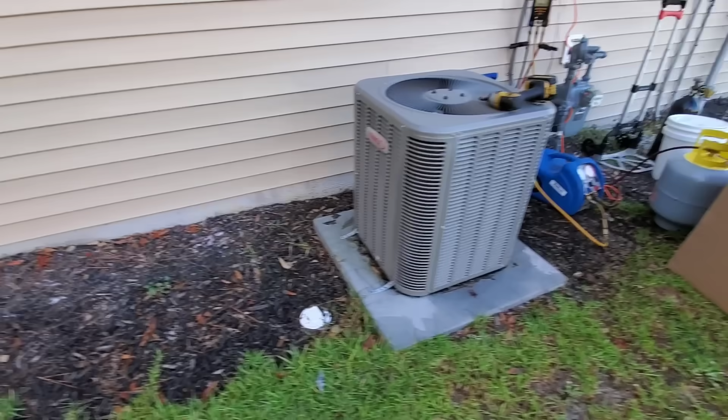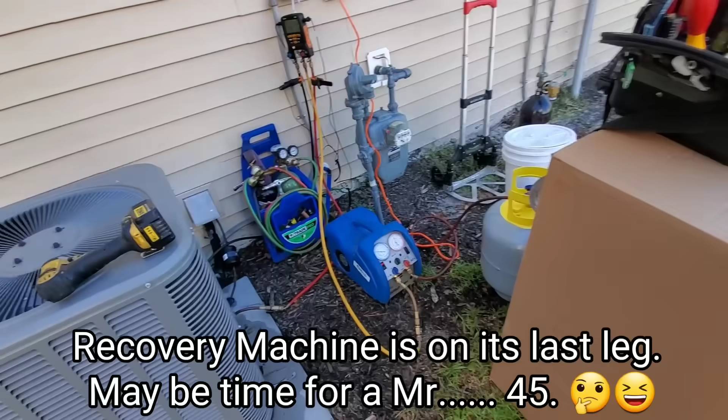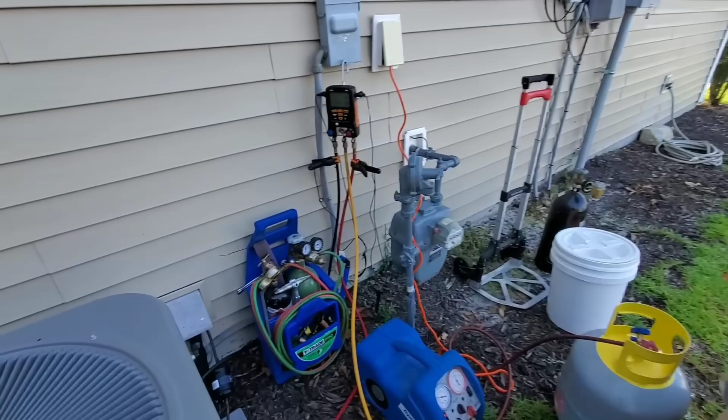This morning's job is to replace a condenser coil in this straight AC Lennox unit. It's under warranty. I think it's a 2016. 2014. But we're in the process of recovering. Down there, we've got a little ways to go, so it's just getting all my stuff out here.

Obviously we got our condenser coil right here. Should be pretty simple. I'm going to go ahead and start breaking down this unit, getting all the panels off, getting these little makeshift hurricane straps and things off, and yeah, get it ready to unsweat once we get it recovered. Well, she broke apart pretty easy. Like I said, it's a straight AC also, so there's not a whole lot of components or anything inside.

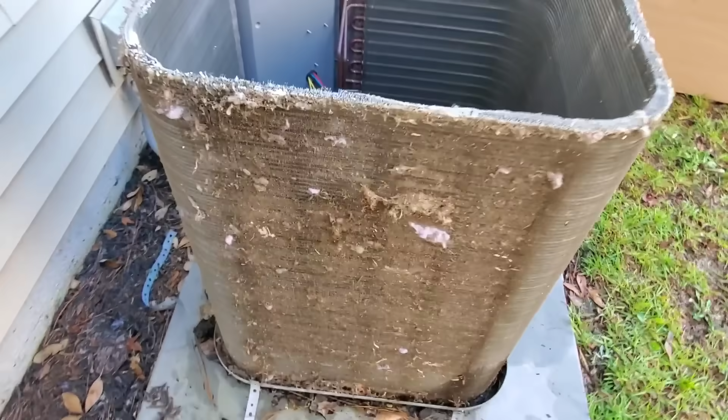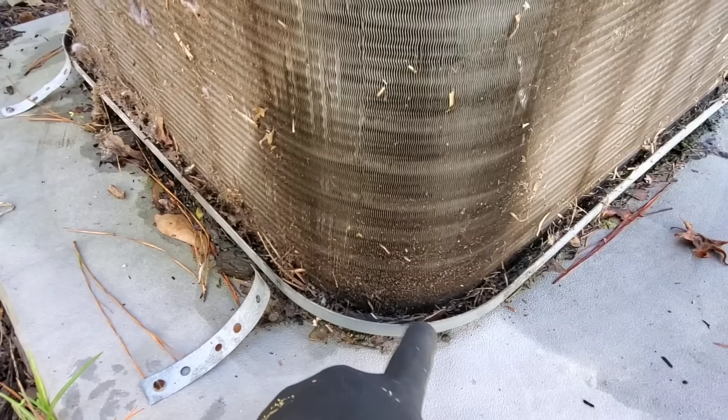You can see this coil's been pretty neglected. And if anybody was wondering, that's where our refrigerant leak is. It's actually on this bottom tube. Looks like it's rubbed against the base pan. So if it wasn't under warranty, it'd be pretty simple to fix. Unsweat it, flip it over, fix it, and reinstall.

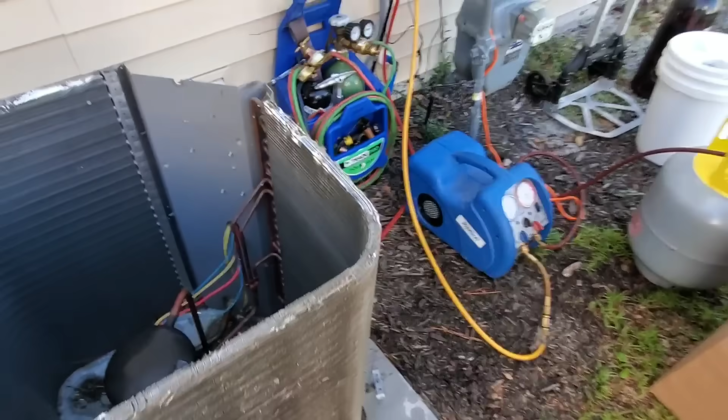But since it's under a parts warranty, there's no real reason in doing that. When you're taking it out to fix it, you might as well just put a new one in. So that's what we're going to do today. She's almost recovered. Getting close.

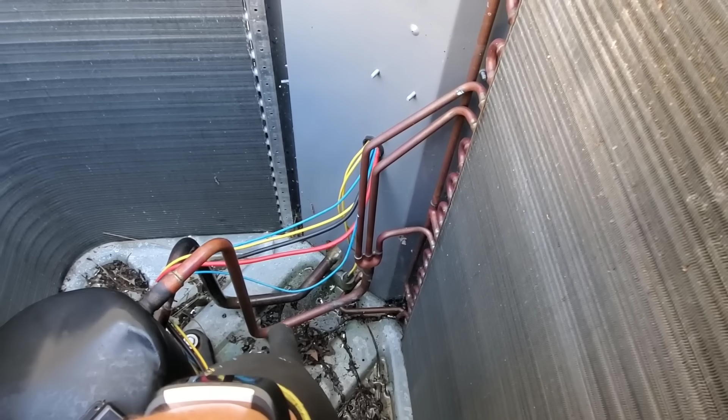And the new coil, we're going to unsweat this discharge right at the bottom of that header right there. And it's going to be kind of hard to see, but there's a pressure switch down there, and there is a solder joint right in front of it. That's what we're going to unsweat and pull that out, disconnect that pressure switch, and that pressure switch is going to go on the new coil.

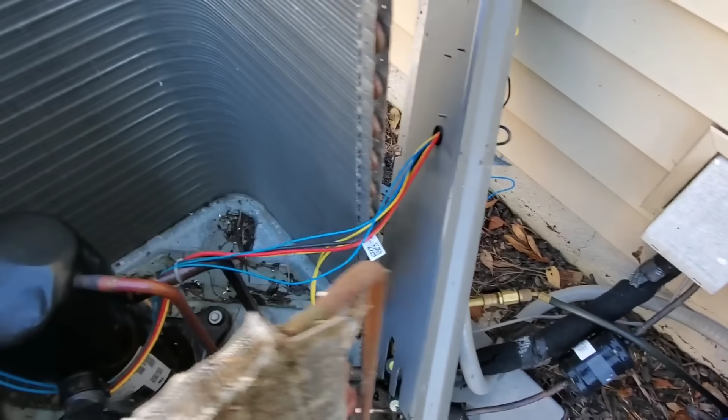We got her all recovered, guys. So now it's just a matter of hooking up some nitrogen and unsweating this coil. Like I was trying to show you before, I'm going to unsweat right here, because from here back, including that fitting for this pressure switch, is included on the new condenser coil. And then we're going to be unsweating that fitting right there. So pretty simple.

Like I said, we're going to be reusing that pressure switch. You can see it can unscrew off of that port. So I'm going to go ahead and unscrew that. I'm going to put a refrigerant cap, wherever I put them. I'm going to put one of these on top of it in its place. And then we're going to hook up the nitrogen, so I can just flow nitrogen and make sure it doesn't just escape here. Make sure it goes all through my condenser coil, so we can displace that oxygen so we don't have any carbon buildup in there.

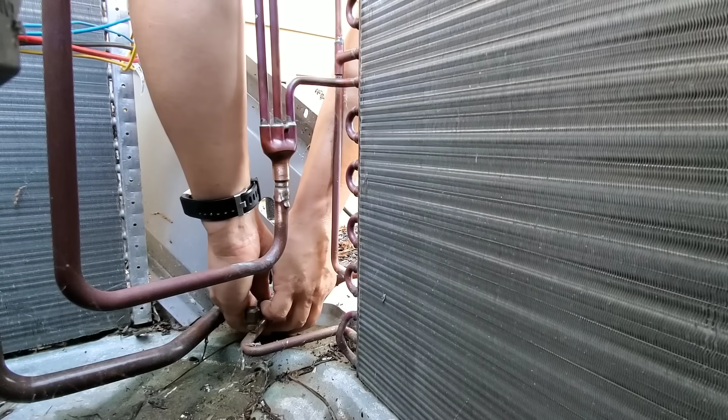And now it's just down on the breeze setting, so it's only between 1 and 3 psi, just a little bit, which is all you need. Let's go ahead and toss some of this. This is Hot Block by Solder Weld. Just gonna toss some of that on there to keep that service valve nice and cool.

See if we'll get this discharge line disconnected first. I think there's 2 fittings right there. It's kind of hard to see.

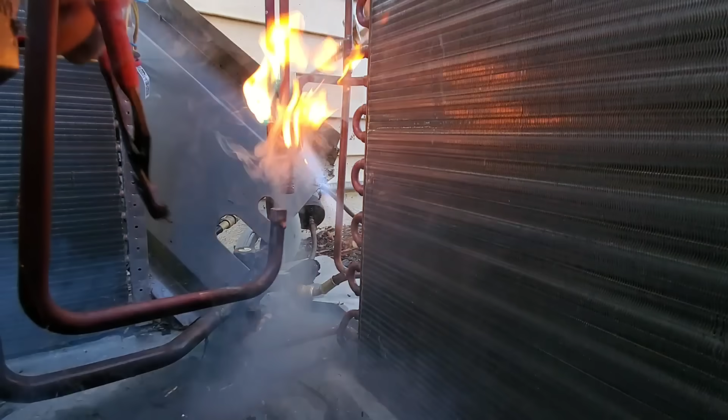Fire! Alright. Go ahead and sweat this liquid line down here.

Up the nitro just a hair, help cool that liquid line valve down. And it's as simple as that, guys.

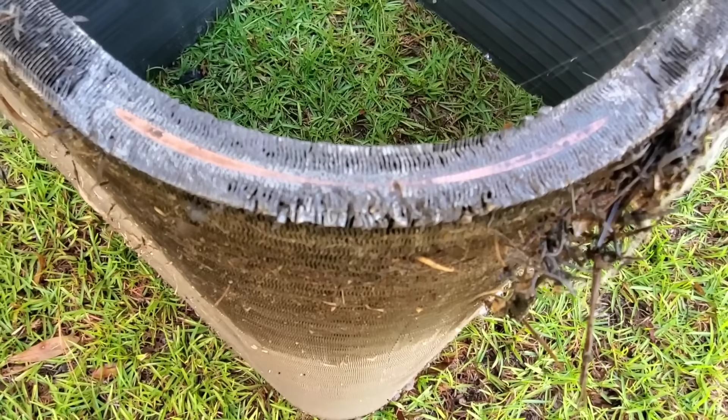Alright guys, we got our coil out of there. You can see here, got the coil flipped over. You can just see she's been rubbing. I don't see an actual hole. It looks like right there might be the culprit, but it's hard to say.

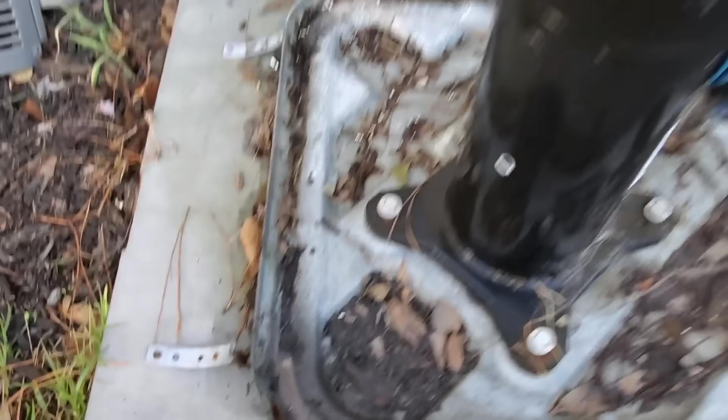So likely what I'm gonna do is put maybe a piece of Armaflex or something down here, or some cork tape, just to try and protect that coil so it doesn't happen again.

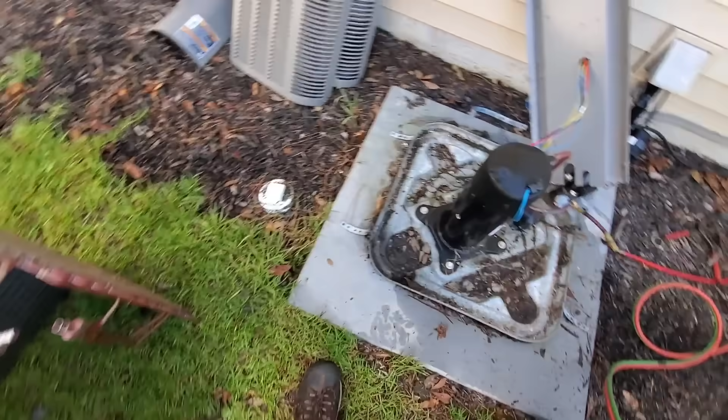Also, what I wanted to try and show, there, see how clean that is inside of there? That's from purging nitrogen. Without purging nitrogen, that would be covered in carbon buildup. So, super important to make sure you're purging with nitrogen, just so you can keep these units clean without contaminating them.

And we got this cleaned up pretty good. Not perfect by any stretch, but cleaned up. So put a couple pieces of cork tape, as you can see, down in these corners, just to give it something between those two metal surfaces so it doesn't rub or corrode as quickly. And yeah, we're gonna go ahead and pop that coil on and get this bad boy brazed up.

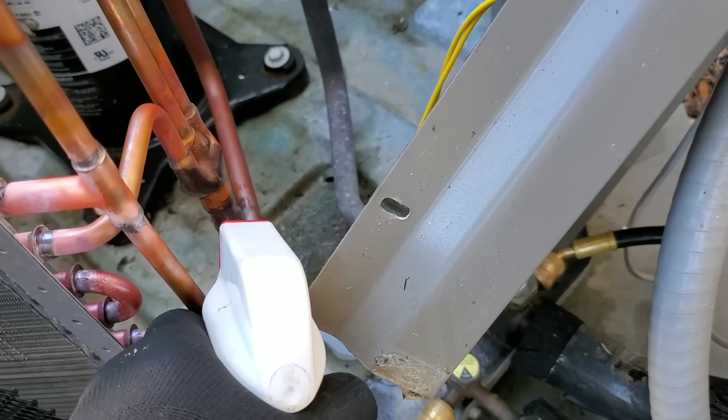Just got it on a super preliminary, easy for me to say, pressure test, just about 160 psi. Just going through everything with the Big Blue, just to make sure all my fittings and everything, that pressure switch down there, everything is nice and sealed.

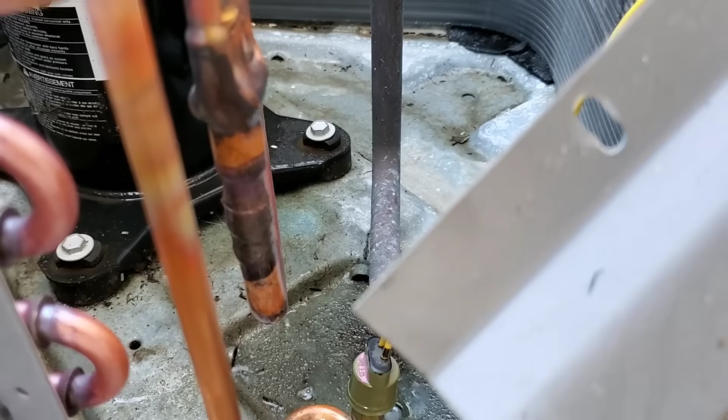And also on that pressure switch, I did throw some Nylog on there just to make sure we get a nice seal, and threw a backup wrench on there just to snug her down. But yeah, we'll give it a few minutes, make sure we don't see any bubbles, and then I'll be replacing that filter dryer, putting it on an actual pressure test, and getting her vacuumed down.

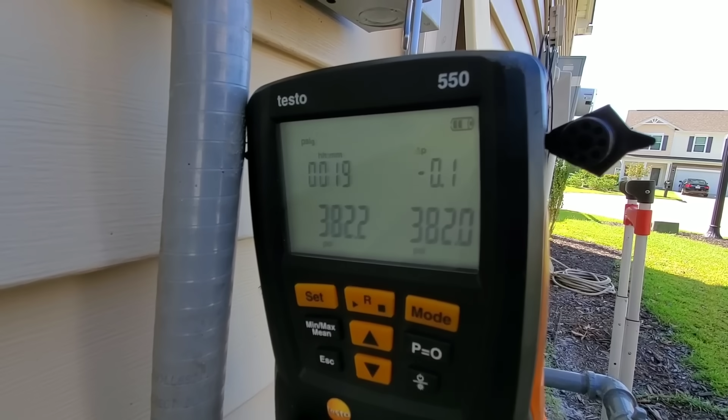Alright, she's all back together. I'm starting to pack up my mess now. Still got a bunch of stuff out here, but have it on my final pressure test now. Like I said, new filter dryer's in. Got my evacuation kit ready. Just on my final nitrogen test. 19 minutes and basically no drop. 1/10 of a psi. Holding at 382 psi, so we're pretty good there.

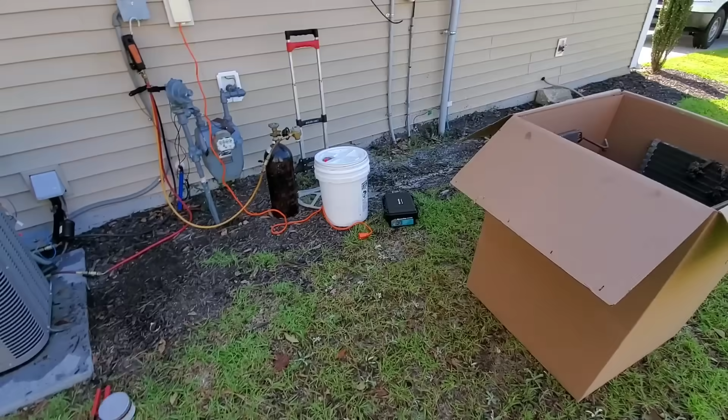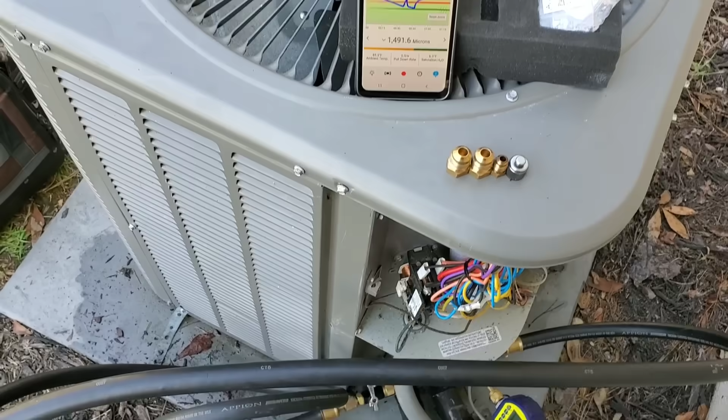But yeah, I'm gonna go ahead and finish packing up the rest of my mess, throwing this coil in the truck, and we'll get the VP85 out and we'll start this evacuation process. Just wanted to make this little update. I'm still pulling a vacuum on this unit. I'm assuming that the vacuum was never pulled properly, because we got down to 2,000, 1,800 really quickly, and then we pretty much stalled out.

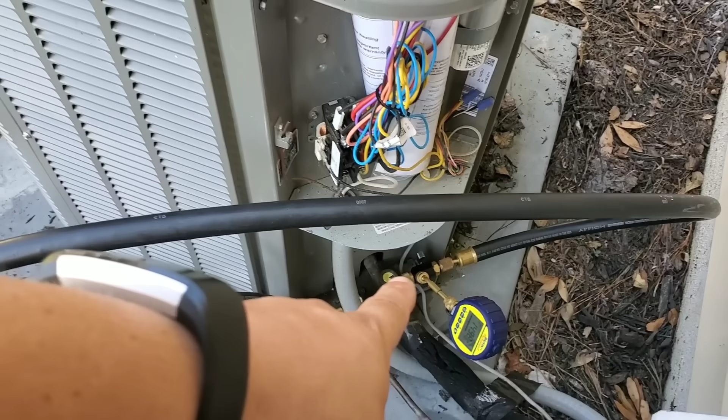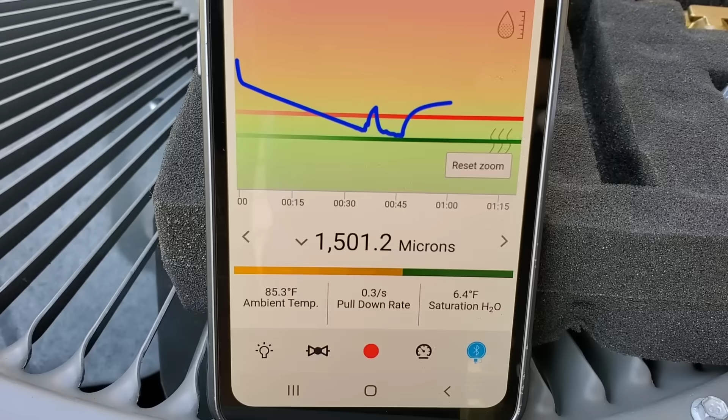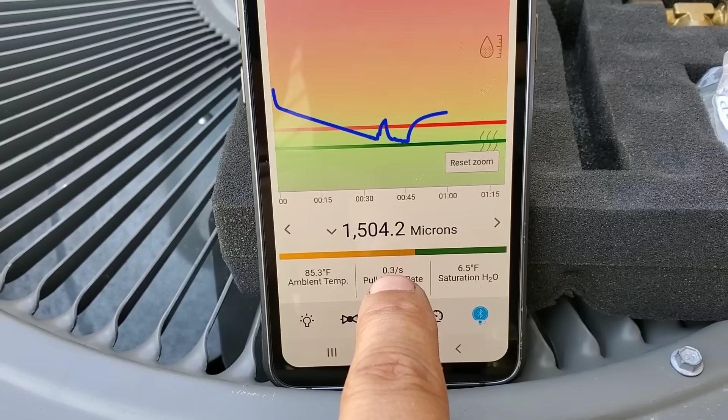So what I currently have is I have the system isolated. I have the Appion core removers closed. Not sure if you can see that. That one's closed, that one's closed. And I've just been letting everything naturally rise. And we started to slow down to almost stop, but this gives you a good idea. You can see this long broad arc right here where it rose and then it started to turn and level off. You can see right here we're still rising at 0.3 microns per second.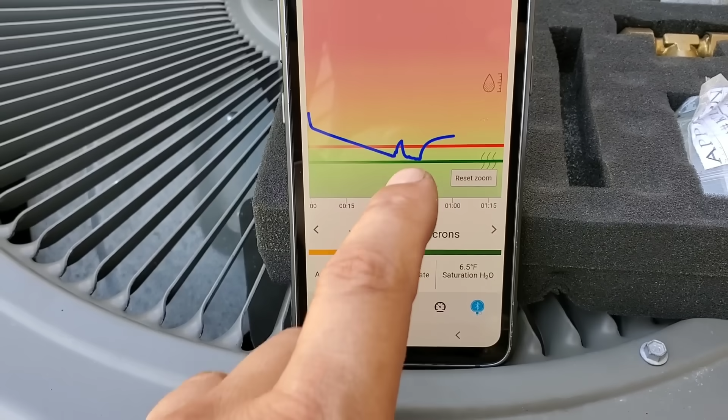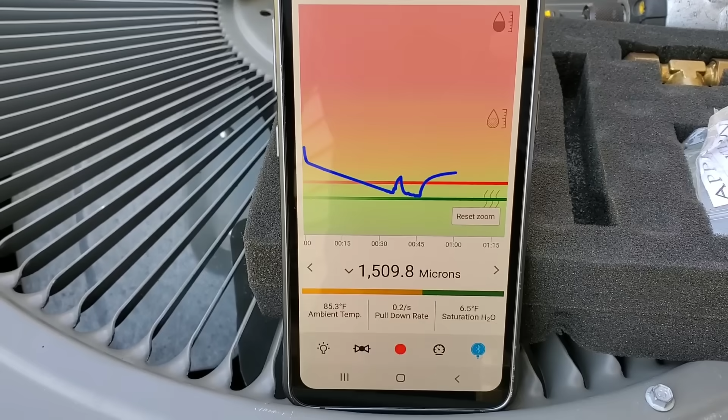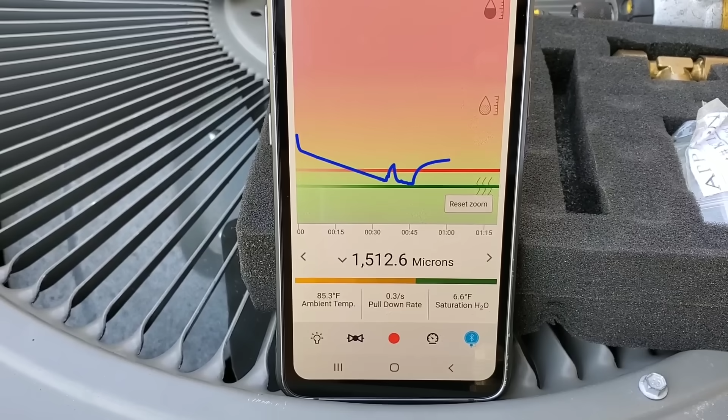So basically what this kind of arc shows you on the BluVac is that the system has moisture in it. If this arc were to just steady go up at like a 45-degree angle and constantly rise, that would tell you that the system has a leak in it. We know it doesn't have a leak because we pressure tested it at 382 psi of nitrogen for about 30 minutes and only had a 1/10 drop.

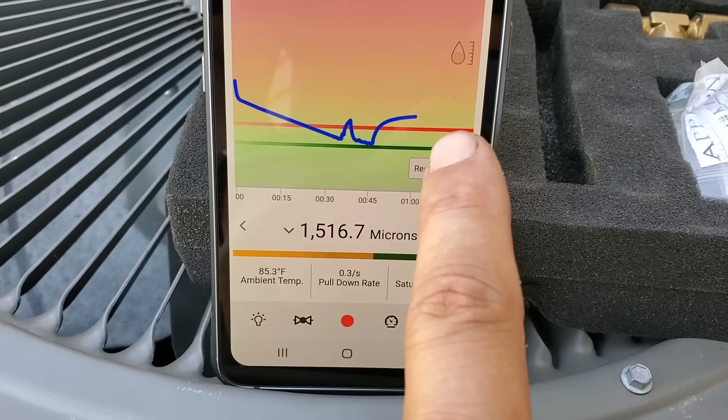So just wanted to get that on video. You can see it's starting to slow down even more. It keeps going down to 0.2 microns, 0.3 microns per second. But just wanted to show that arc right there that's slowly starting to flatten out. It just tells you that you still have moisture in the system, so you need to keep on evacuating.

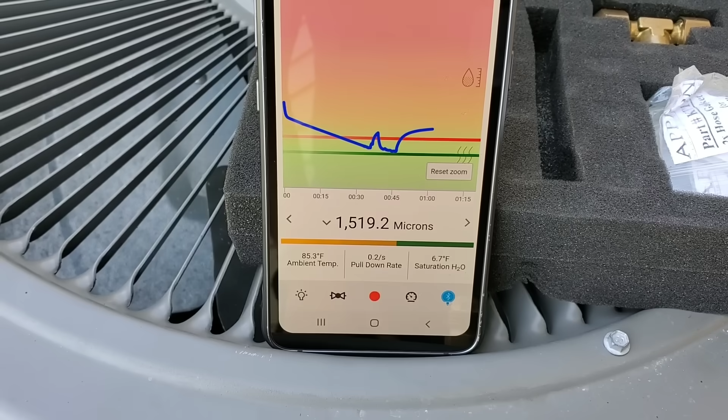So occasionally, once I stall out, I'll isolate and let everything rise back up. Just make sure that I'm still dealing with moisture, give it a little bit of time for any moisture to boil off in there, and then I open the lines back up again and continue on with the vacuum. So I'm going to go ahead and open these lines back up again.

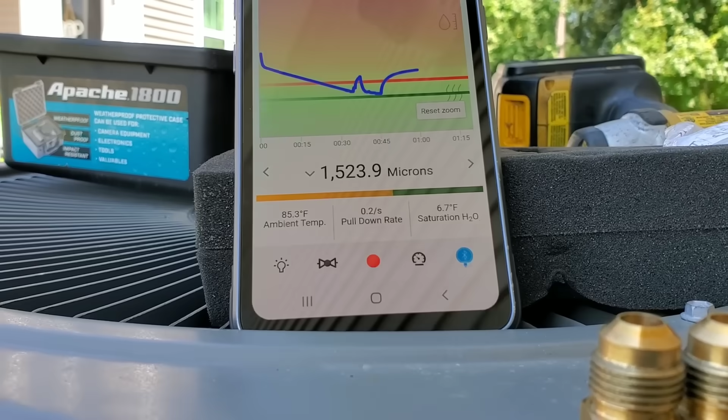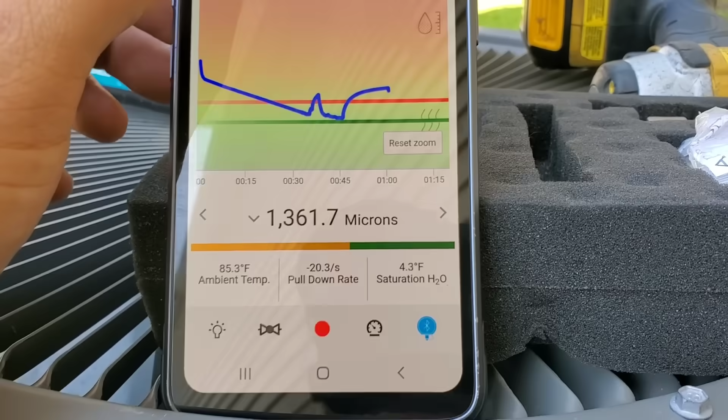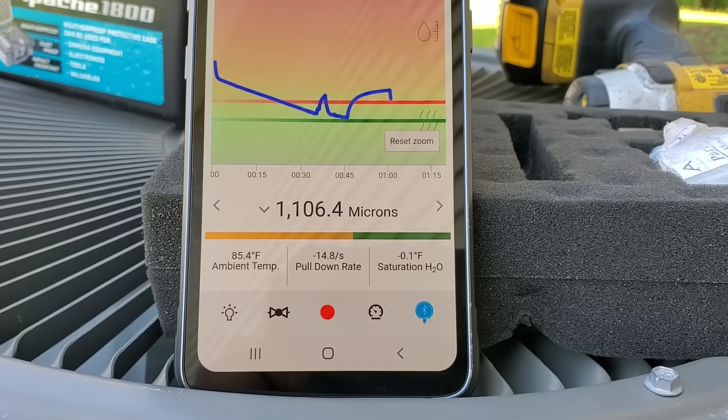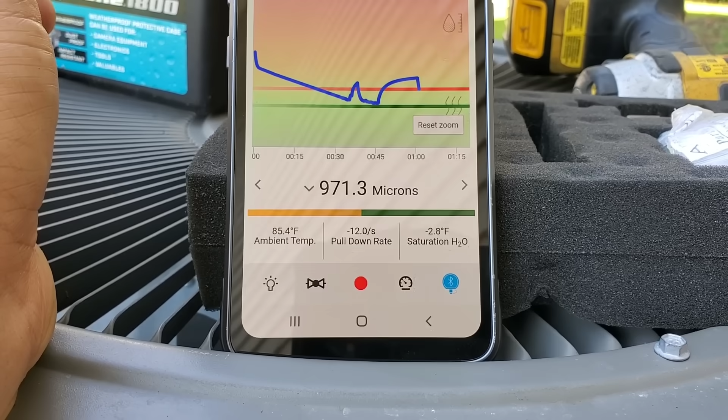Last time I got down to right around 550 microns. But sometimes, if you want to do best practices, evacuations take a long time. When the system's new or the system's nice and dry, you can pull them down really quickly. But like I said, I'm assuming that best practices weren't used on this system when it was originally installed, but we'll get her pulled down.

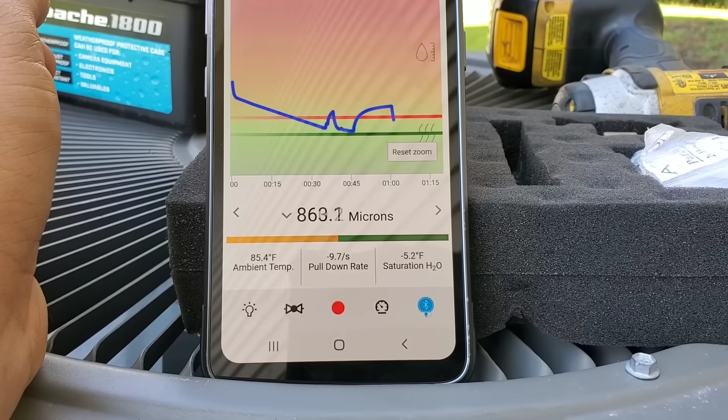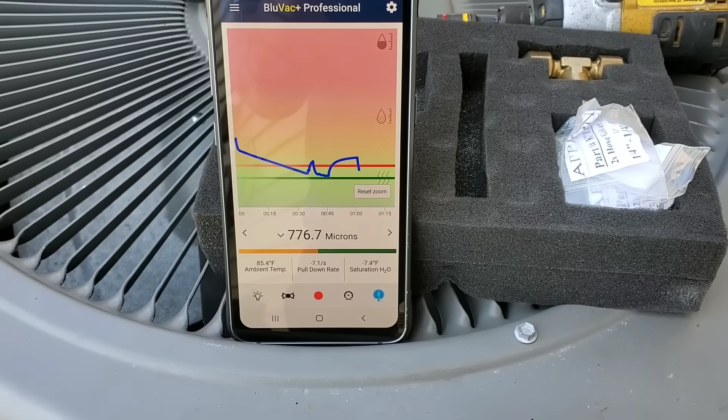So I'm going to give it a little bit of time, let her pull back down again, see if we can get her down under 500 and stable in our decay test. And yeah, just got to be patient. Now you can see we're down under 500. You can see we rise up and then it'll drop back down again.

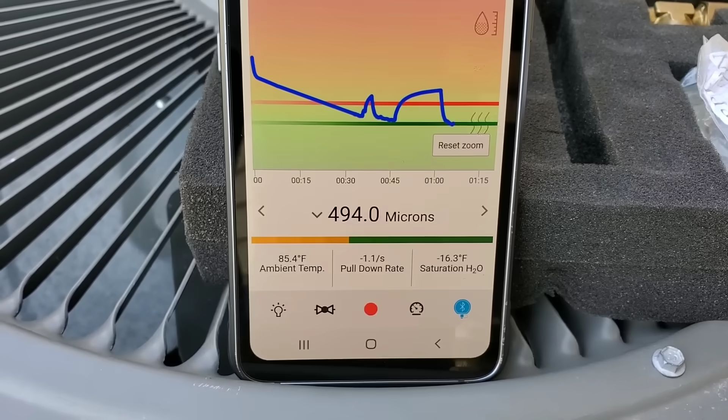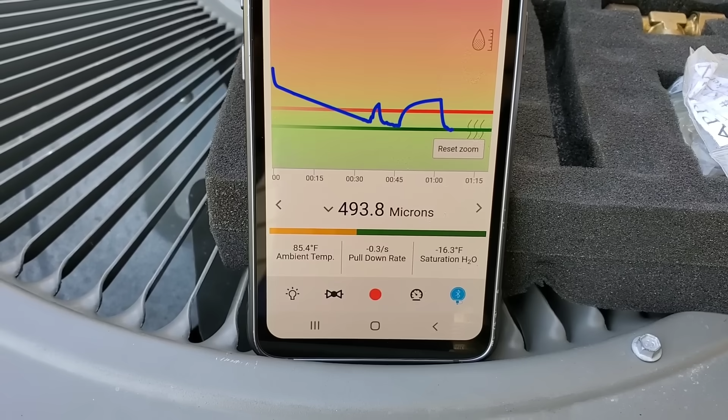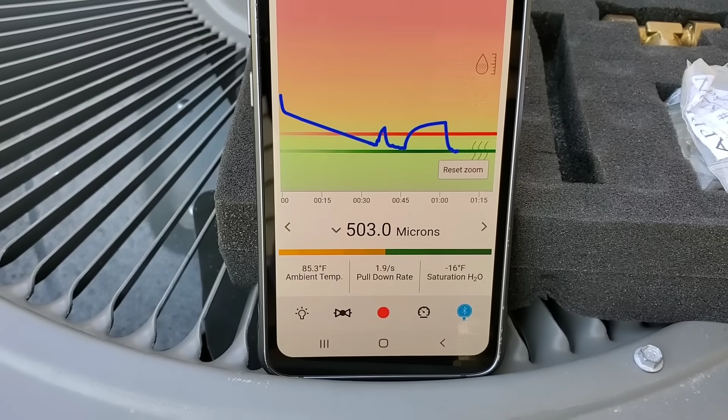And like I said, this is just an indication that there's still moisture in the system, so we're going to be patient. We're going to pull this bad boy down as far as we can. We do have a new dryer in there to pick up any moisture. Like I said, best practices were definitely not used when this thing was installed, but we'll get it down as low as we can before we perform our decay test and charge this bad boy up. But I thought that would be good to get on video.

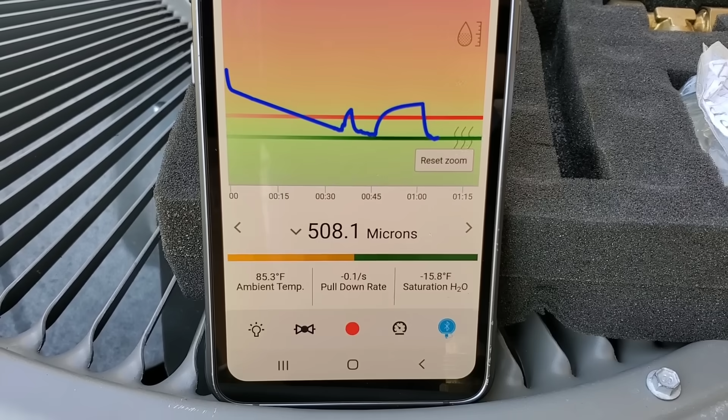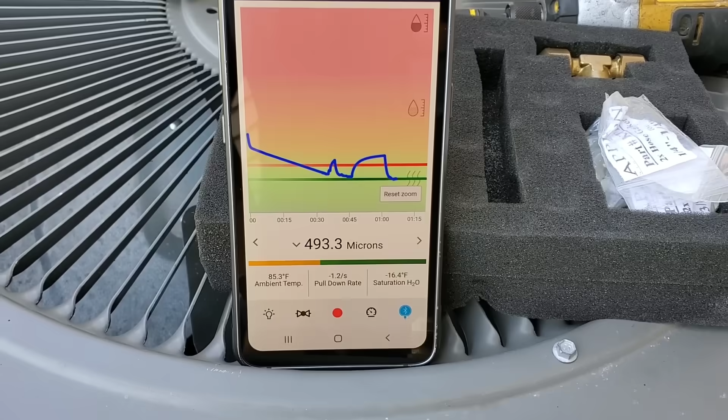Like I said, every evacuation, every vacuum isn't perfect, especially in the real world. Not everything's in laboratory tests, so when best practices aren't used on an existing system, sometimes it makes it hard for the next guy coming out doing repairs. But we'll get her down as low and as dry as we can before we charge her up.

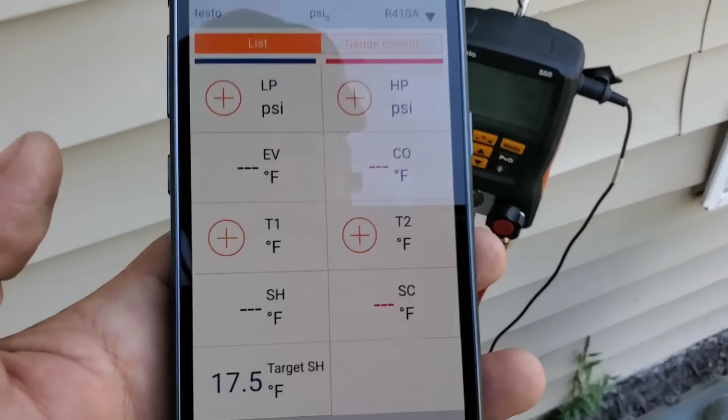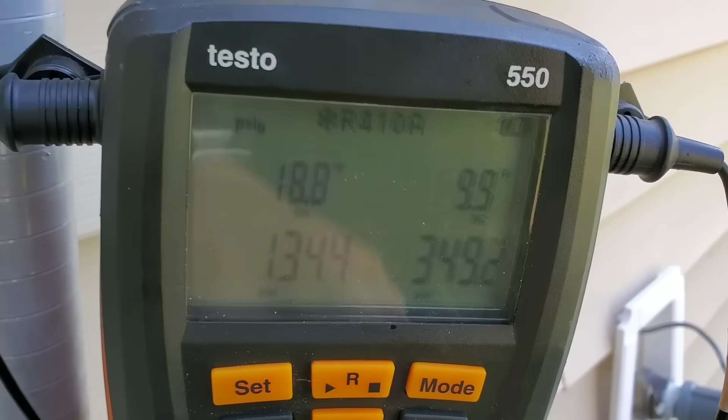Alright guys, we are back up and running, all charged up. We're dealing with a piston out here. So we have an 88 outdoor dry bulb and a 68 wet bulb, so we're looking for 17.5 as our target superheat. Let's see if you can see that. Plus or minus 3 degrees for 410A, so we're sitting pretty good right there.

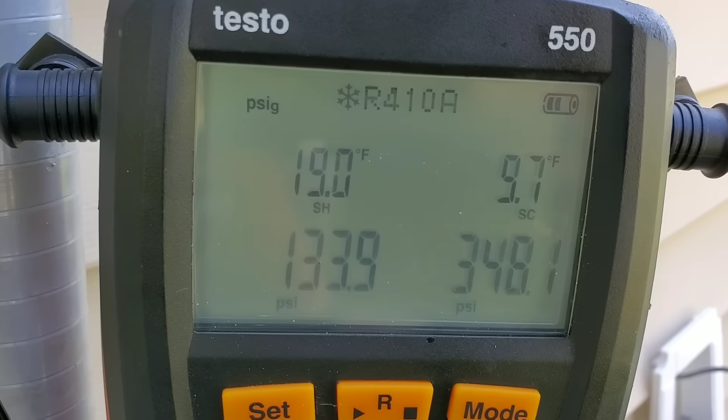9.7 subcooling and 19 superheat, so I may put a splash more in it if the superheat rises too much more, but we'll give it a few more minutes to steady out. But pretty happy with those numbers.

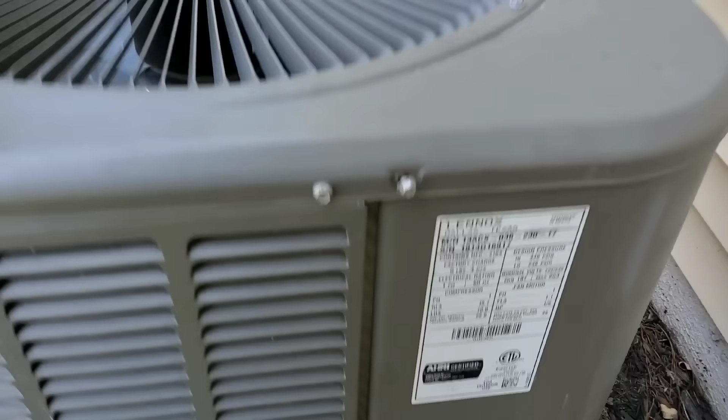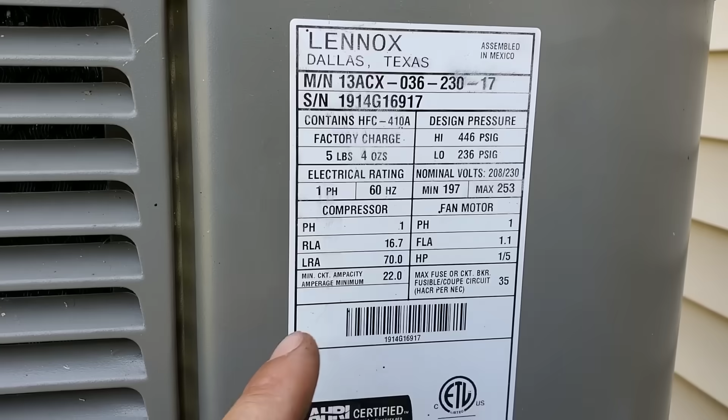One last thing I wanted to mention when it comes to recharging or charging systems, adjusting refrigerant charges: this one doesn't have it, but a lot of times you'll see a required subcooling on the data tag. That is only to be used when you're dealing with a TXV metering device inside. When you're dealing with a piston, disregard that required subcooling and focus on your target superheat. A lot of times if you're chasing that required subcooling, you'll end up overcharging a system depending on the conditions.

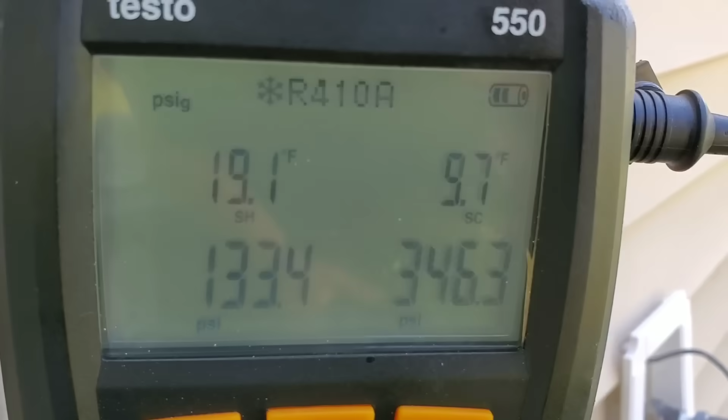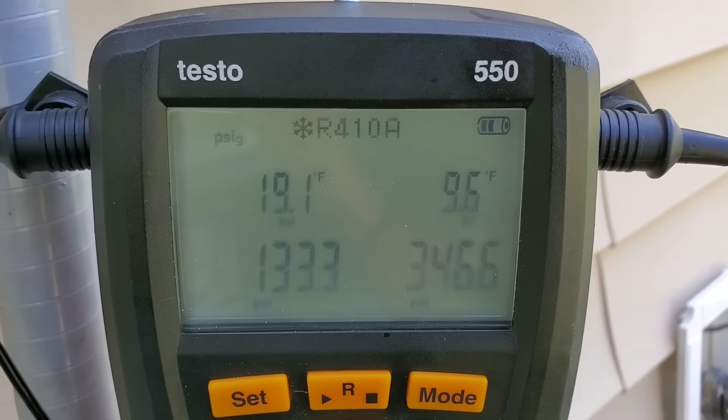But for this one, like I said, my target's 17.5 superheat. We're sitting at 19.1. Once you get that into range, then start looking at your subcooling, which will give you an idea of how things are performing. So in this case, everything's looking just fine. But yeah, just keep that in mind, guys. That target subcooling on data tags is only for a TXV metering device. So just keep that in mind, guys.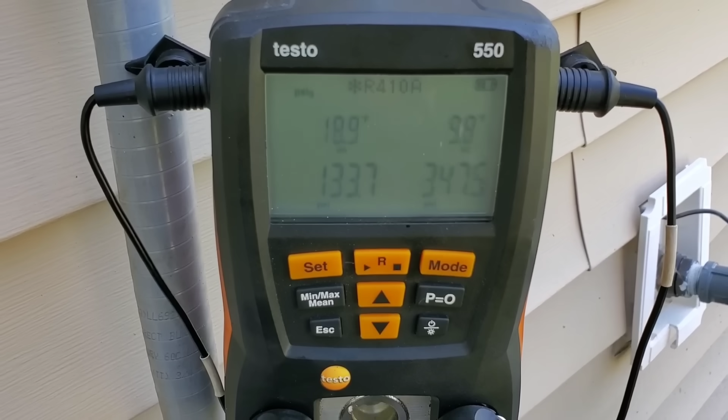But I'm gonna go ahead and wrap this one up. Looks like we're hanging tough right there, 10, 11 superheat. So I'm happy with that. So gonna go ahead and pack up everything, write it up, and get on to the next one.